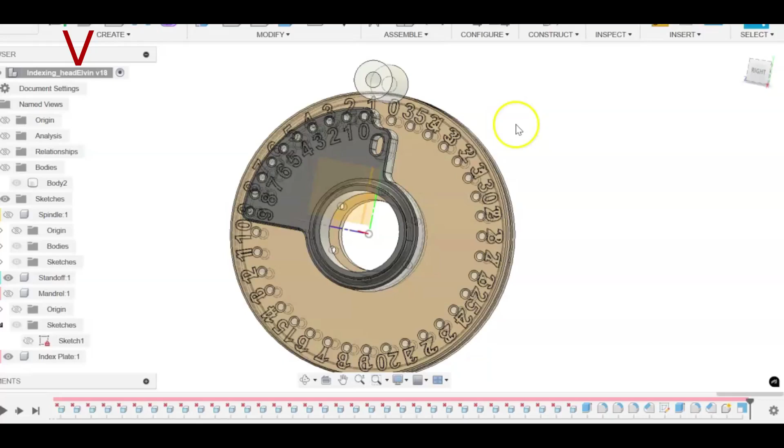So here you see the difference after rescaling, and you also see now that the standoff is totally out of the whole thing, floating directly apart after the resizing, which of course takes quite a long time. So now it's 110 diameter.

But we'll now have to make some changes in the design to make sure the standoff is somehow able to connect. I'll probably do it with a 3D printed fork or something like that on top of it, so it can stay small. It's a kind of fork that goes around the standoff and connects it, because I'll be using the standoffs that are already there. Probably easier to do it like that, because the outer plate will be around it too.

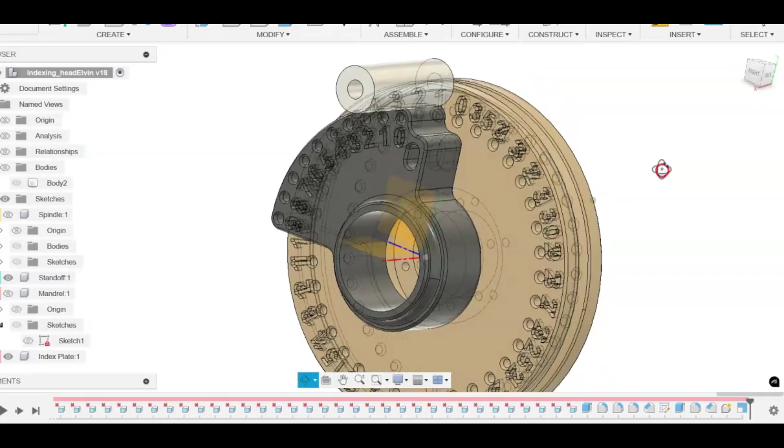And of course, when I'm driving it, it won't use this whole middle part. So I'll remove that indexing pin plate, not connecting it to the standoff, and of course I'm driving it to the milling without the indexing.

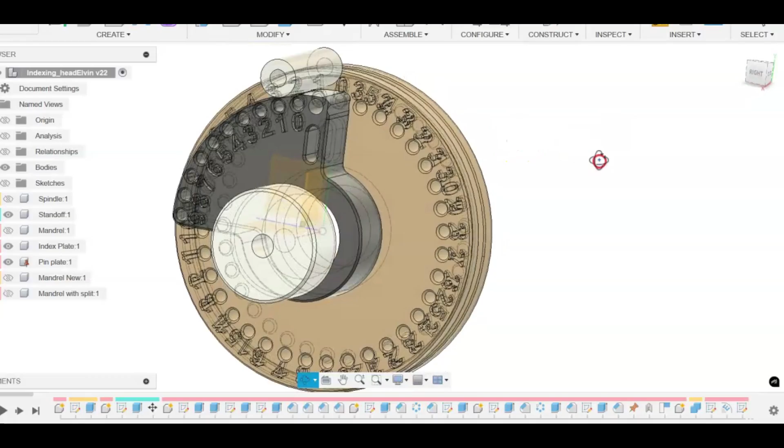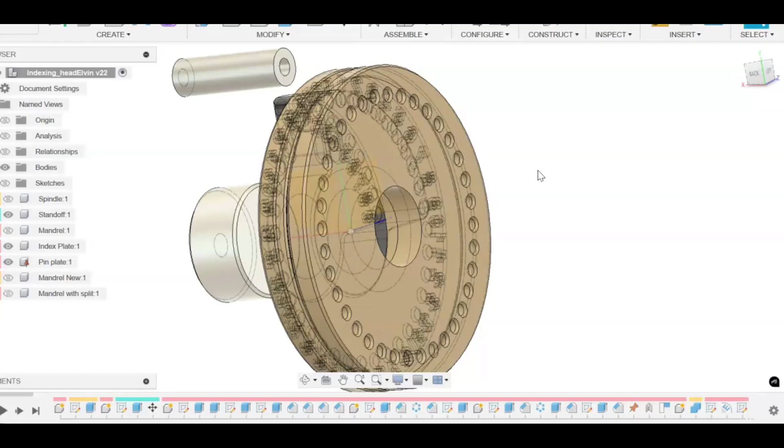I made a couple of other small differences, and that also goes for the size of the holes. I made them in the designs with the scale factor now included, and as you see here, I changed this to make the fork connect later, but I'll use it as is for now, because it's very slow to make any edits on this design now. So I'll break it up and just export these parts and work on them piece by piece.

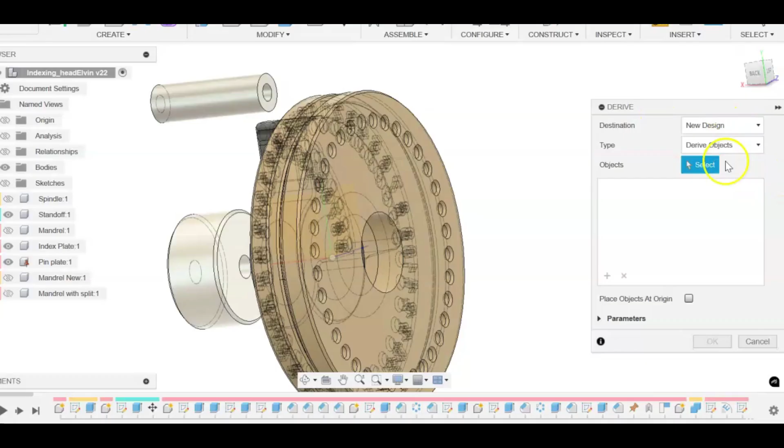For that I now use Create Derive, and in this case I'll use a new design. I'll select the objects, which will only be the body in this case, and make a new one. I can place it at origin, that's okay for this. Now it will work further just in this design, and that goes for the other parts too.

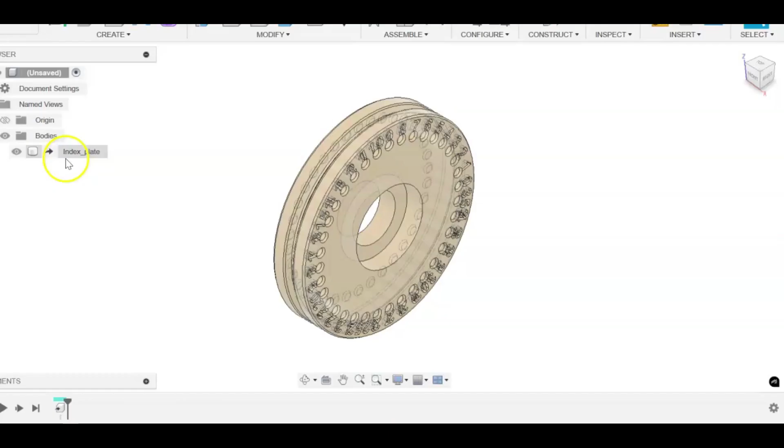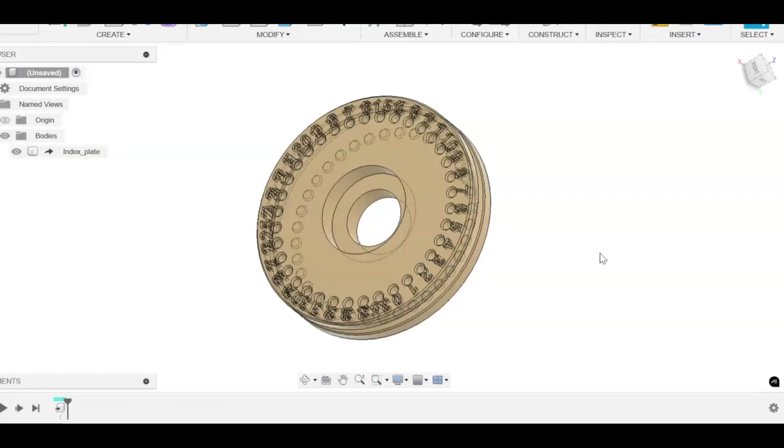So I'll just make a couple of derives, you see them coming here as a derive. I leave them also as a derive, but then I'll work on this further in here. I changed some sizes and took out the holes that are here. For example, I'll make the design depending on the parts I have laying around, which I can work with given my limited possibilities.

So this will be the stock materials, and I'll first make a bushing that goes around here and deep in there so I can connect it. Without any indexing possibilities, I'll make holes in it to connect, but inside there will be a 20 millimeter, or probably 19, hole through the middle that connects all the way to the spindle, instead of one part here. But that one part will also be used to slide the other part around.